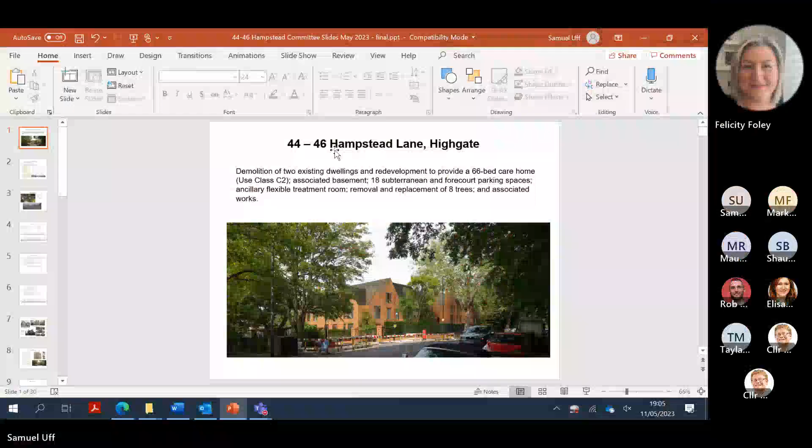Right, we will now consider the planning applications. So this is item 8, and it's the 44 to 46 Hampstead Lane. That's pages 1 to 82 in the pack, and the reference number is 2731. I won't read it out because it's in the pack. The recommendation is to grant permission, and I would just like to notify the committee that I did agree that we would have a third objector speaking tonight. So I would just want you to note that. So I'm now going to pass this to the planning officer, Samuel Uff, and Samuel's going to introduce the application.

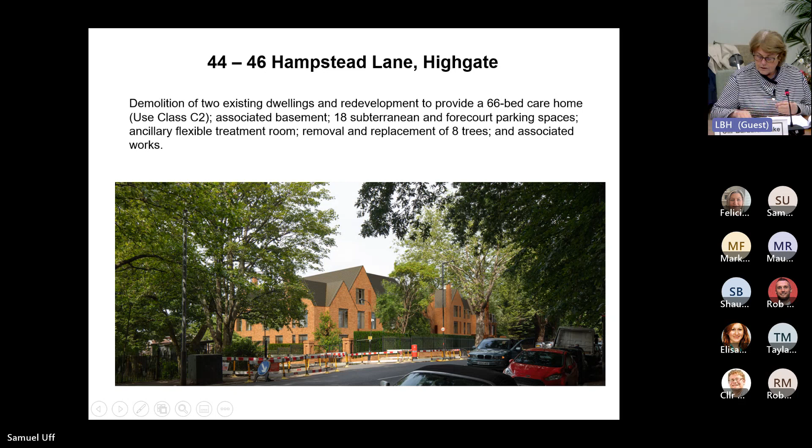Thank you, Chair. Good evening, all. So I'm sure you already know this is 44 to 46 Hampstead Lane in Highgate. The application is for the demolition of the two existing dwellings and redevelopment of the site to provide a 66-bed care home within the C2 use class. This will have an associated basement, 18 subterranean and forecourt parking spaces, ancillary flexible treatment room, and removal and replacement of 8 trees and associated works.

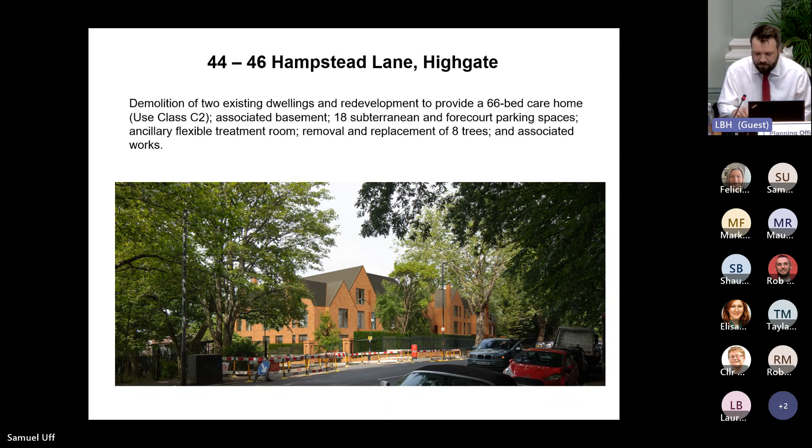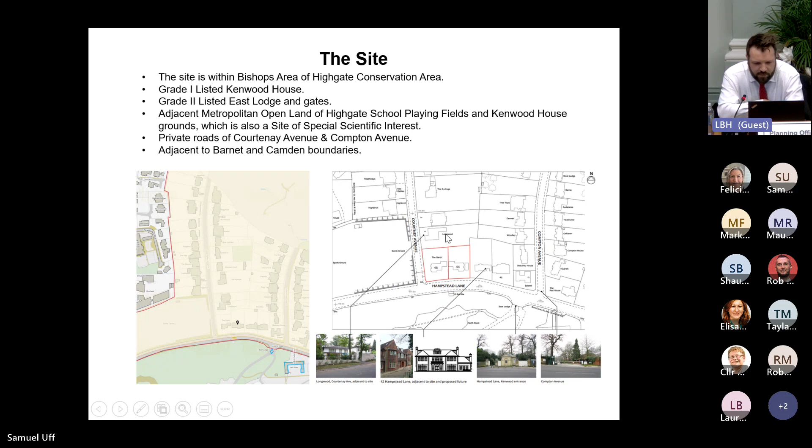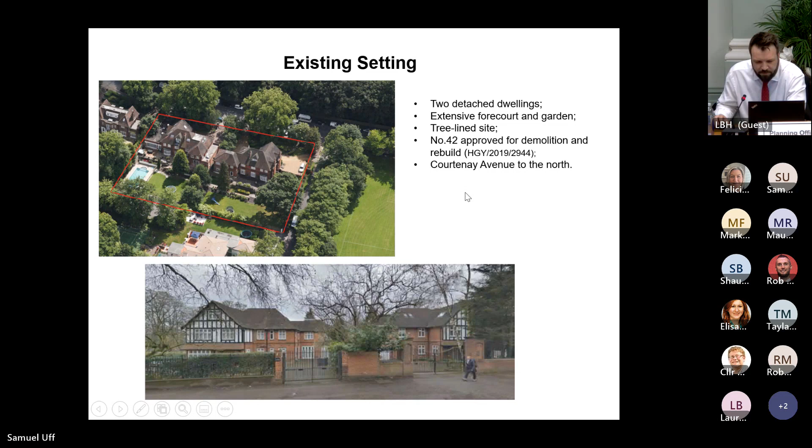A bit about the use would be that it's 24-hour nursing care, and does also have the treatment room, which is in the corner here.

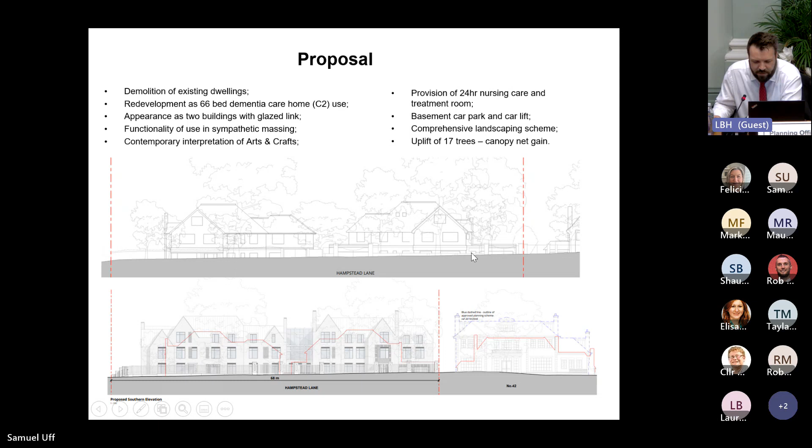So in terms of the principle of the use, the proposed care home has been determined to fall within the C2 use class as a managed care facility with no private ownership of the units.

In terms of national, regional and local policy, they all highlight increasing demand for elderly care provision and specifically dementia care. The applicant has provided two needs assessments carried out with regard to national and local data. These have raised issues of the ageing population, increasing cases of dementia within society and the locality, and issues of quality of provision. These highlight local shortfall and

substandard quality of the existing beds. Also that these are not future-proofed and/or not specialists for dementia care.

They've also highlighted the shortcomings in the COVID-19 pandemic, where substandard rooms, lack of en suites and wet rooms, cramped facilities and internal layout issues really highlighted those issues of cross-contamination between residents.

In terms of the type and tenure, this is considered to be suitable for the area, and the applicant has committed to target this at Haringey residents as captured within the Section 106.

Likewise, service provision within the site would be in the case of the 24-hour treatment, as well as cosmetic services that would be provided in-house and by visiting services. There would also be an NHS Section 106 contribution in terms of helping out local NHS services.

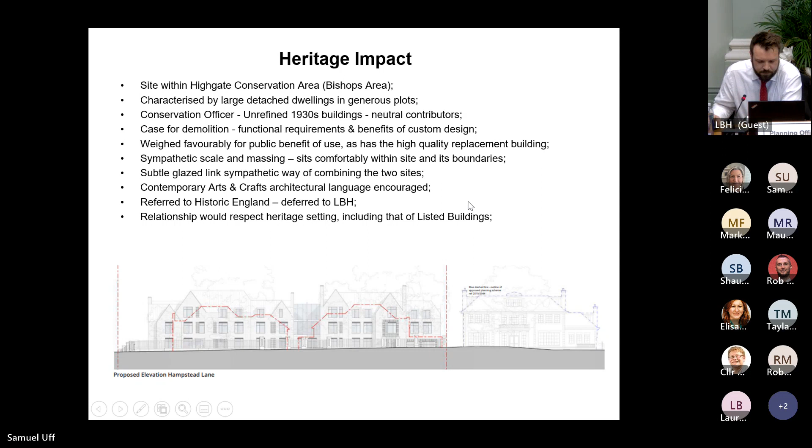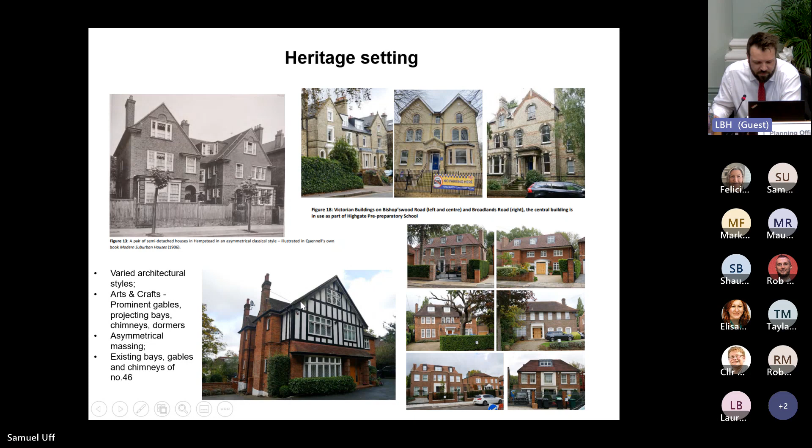In terms of the proposal, the detailed design would be in the arts and crafts architectural language, but a contemporary take on that. The design and conservation officers and the QRP have all been supportive of this approach through extensive pre-app discussion.

The frontages would be seen as asymmetrical massing, but would still have the appearance of the two houses, with a subtle glazed link sitting between the predominantly brick frontages. The prominent side gables, projecting bays and chimneys, sweeping pitch roofs and brick detailing of the proposed development would reflect that of the heritage setting.

These will also be in high quality materials, which would be captured in condition. The design of the roof and the height enables the solar panels and lift overrun to sit comfortably within it, so they'd be hidden from the street and views of the frontage.

The defined main entrances for the treatment room and for the main entrance to the care home would further enhance this appearance of two houses.

The proposed building would sit comfortably within the context, with massing similar to either number 42 as existing or as approved. This would be a modest increase in scale, but would be required for the use, and is considered to be comfortably accommodated within this setting while still retaining settings from side and rear boundaries.

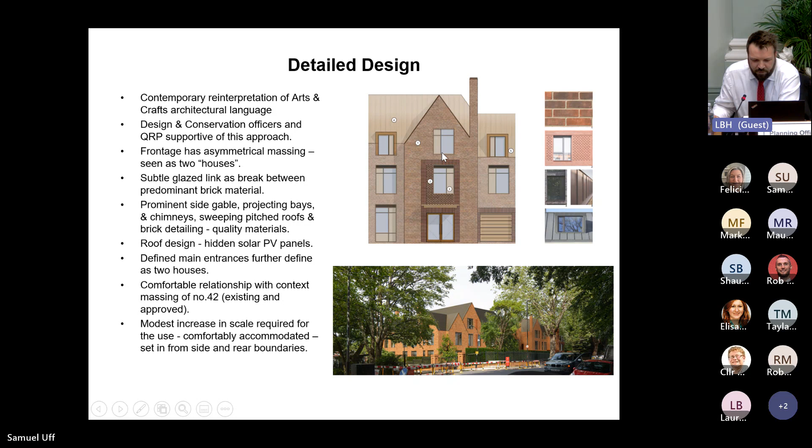Moving around to the side, this is the view as would be seen from Courtenay Avenue. As with the existing building, you can see there are prominent bays and chimneys which would sit within this frontage, but they would have a stepping down massing both from the Hampstead Lane frontage and towards the rear of the site, responding to that topography.

As you can see, the slope down is quite drastic, so this would be successful in incorporating the stepping down of massing.

You would still be able to retain views beyond the rear of the site, of the wooded rear gardens and golf course beyond. The boundary frontages and sides would be screened with boundary edge hedgerows and enhanced planting, as well as a railing on the outside.

You can see here the distinct relationship between the more prominent dwelling, existing and proposed, on Hampstead Lane, to the more subordinate Courtenay Avenue to the side.

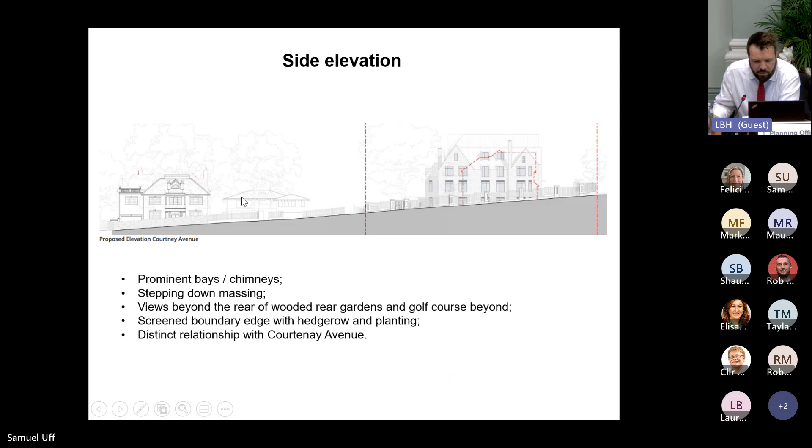Looking at the rear elevation quickly, here you can see again the rear massing is coherently stepped down and broken up with the use of balconies in recesses, subtle dormers and glazing which would sit comfortably within the roof. There will be relief from the side and rear gardens, and this would, as mentioned previously, retain and improve existing landscaping.

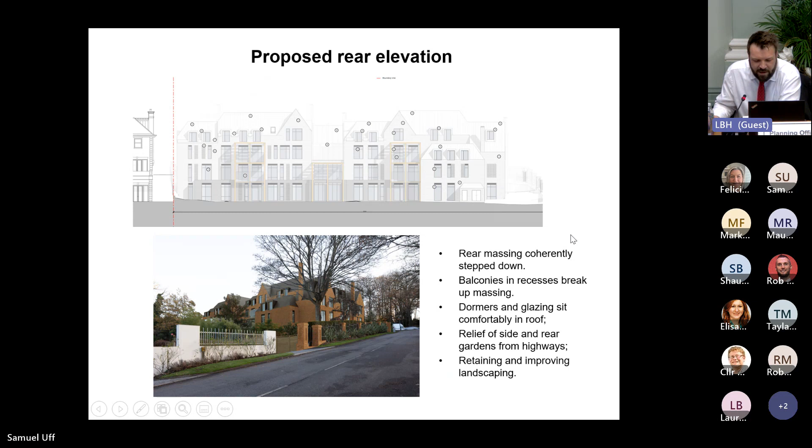In terms of the actual use and quality of the accommodation, as previously mentioned, it's a managed facility with 24-hour care. It will be fully accessible with lifts within.

There are 2 lifts within the core, and you can see from my cursor, 1 in each core, as well as 1 at the front, which would serve for refuse and servicing.

The layout of the flats and the use is dementia friendly, both internally and externally in the design, and the applicant has agreed to comply with the Stirling University accreditation, which is the highest standard for dementia care.

The layout of the flats, with private ensuite bathroom bedrooms, would be in small groupings, categorised by similar requirements. You can see the pink areas here, the 3 at the back.

Those are communal areas and would provide a varied space for residents. All the communal spaces and bedrooms would have views onto the landscape setting.

There will also be on-site facilities and services to the site, and the treatment room at the front of the site would have its own independent access, but would predominantly be used by the end user. The actual end use of that will be determined as this gets built out and in consultation with all stakeholders.

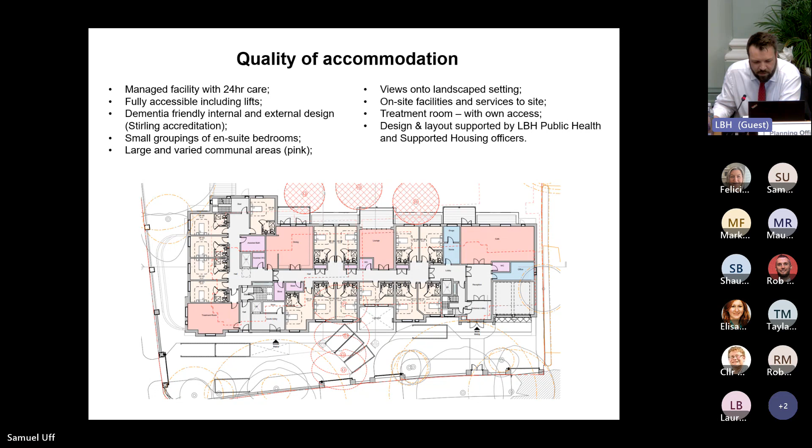The design and layout has been supported by the Haringey Public Health and Supported Housing Officers, who have been in contact with the applicant through pre-app discussions.

So the proposed basement would appear as 2 stories in the front part, but as it goes to the rear, it would appear as a lower ground floor and single-story basement, with the lower ground floor accessing directly onto the garden.

A detailed basement impact assessment has been submitted and reviewed externally for the council by structural engineers CampbellReith. The impact on neighbouring structures has been determined to not exceed Burland's Category 1, which is very slight, and this has been found to be structurally sound, subject to conditions and other legislation.

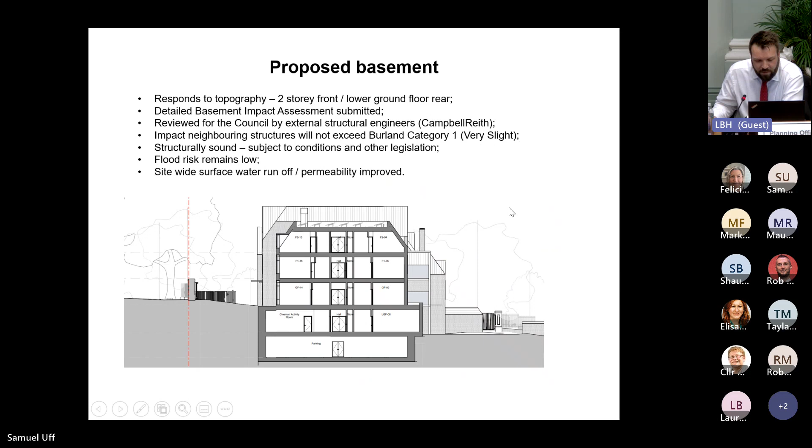The flood risk remains low, and the site-wide surface water runoff and permeability would be improved as a result of the development.

In terms of the transport impact assessment, there would be 18 car parking spaces, with 7 spaces in the forecourt and 11 basement car parking spaces, 2 of which would be for disabled access, also served by the lift, so it would be fully accessible.

In the front part here, you can see there are 2 car lifts, providing access from ground level to the basement. The transport assessment concludes that the site would be capable of accommodating the use.

There are 4 existing accesses to the site, two for each house. One here from Courtenay Avenue acts as a trades-in exit for servicing and deliveries, exiting onto Hampstead Lane. A separate vehicular access is accommodated for the basement car parking, which also has an out.

There will be generous storage provision of bicycles in the basement, and they're also investigating whether to include cycle parking for short stay on the forecourt.

The site does have a low PTAL of 1, but it is noted it has bus stops within close proximity - one directly out front of the building, and another just around the corner - which provide regular bus services to Archway, Highgate, Golders Green, and East Finchley tube stations.

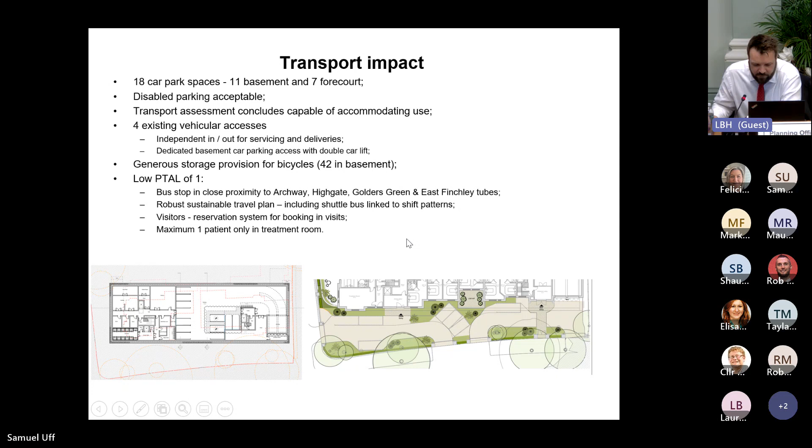In terms of visitors, they would be required to provide a reservation system for bookings. If the treatment room is to be used by the public, there would be a maximum of 1 patient at a time, so there would be no knock-on impact on transport there.

With regard to amenity, the main impact would be on 1 Courtenay Avenue to the north of the site and number 42 to the east.

Number 42 has been considered in terms of the existing and proposed building within the BRE daylight and sunlight assessment, which also considered the topography of the site and the sloping to the rear.

There has been an additional study which confirms there will be no significant overshadowing to the rear garden of number 1 Courtenay Avenue from the development.

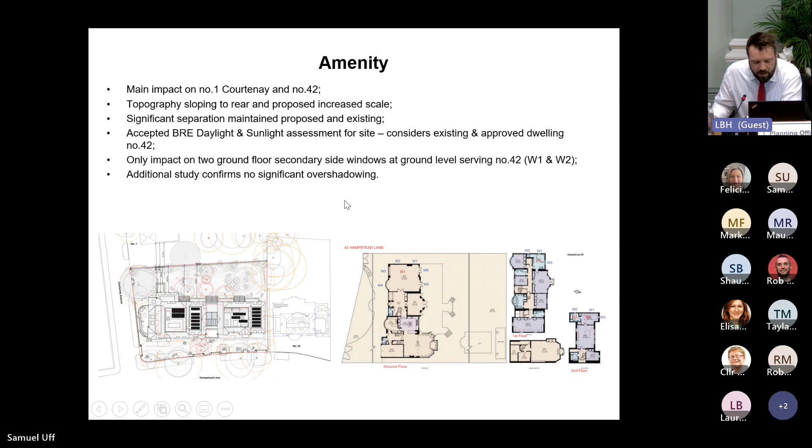In terms of nature conservation, the site has a historic area TPO which protects existing historic trees on the site. The application would include the removal of 4 mature trees at the rear of the site.

These are shown on the left, the red circles, and also a group of 4 smaller trees in the front of the site along the boundary, which are shown at the front here.

These four at the back have all been graded as low and moderate quality and have been assessed by the tree officer who agrees to the removal. The remaining trees on site would be retained and protected.

The boundary fencing and hedging would provide a green perimeter, which would be retained and improved. There would be no encroachments on the MOL or its setting. The MOL is Metropolitan Open Land, and the area in question would be Kenwood House Gardens and Highgate Playing Fields.

In terms of the proposal, it would provide a replacement of trees, including 10 multi-stem trees and 15 new large trees. There would be a net gain in canopy cover, which would be secured by a condition.

The landscaping of the rear has been specifically designed with dementia-friendly use in mind. There would be an improved biodiversity net gain and urban greening factor as a result of the development. Likewise, improved hard landscaping permeability and sustainable urban drainage systems would be incorporated into the design.

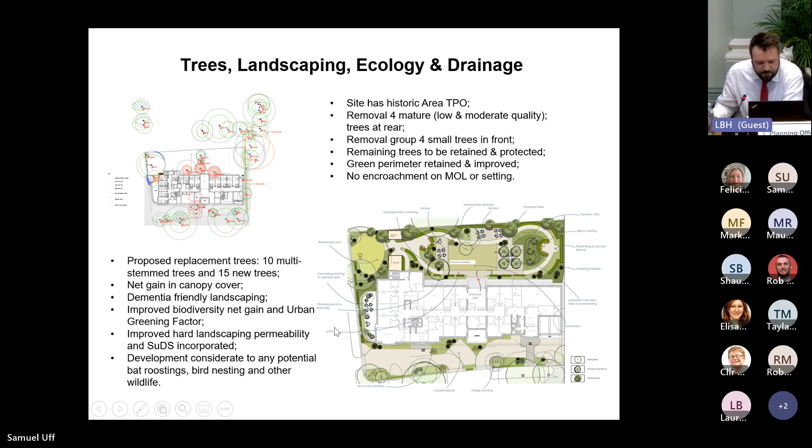So with sustainability, the design has been comprehensively worked through with a strategy considering u-values of floors, windows, walls, and roof, cooling, heating, lighting, and thermal bridging. The site offers improvements of 37% carbon emissions.

And in terms of green energy, there would be provision of solar PV panels, shown on the roof, and air source heat pumps. This would provide a 21% reduction in carbon consumption. There would also be ongoing site monitoring, which would be conditioned.

Overall, the site has a carbon shortfall of 22.2 tonnes of carbon per year, and this would be offset for a Section 106 financial obligation.

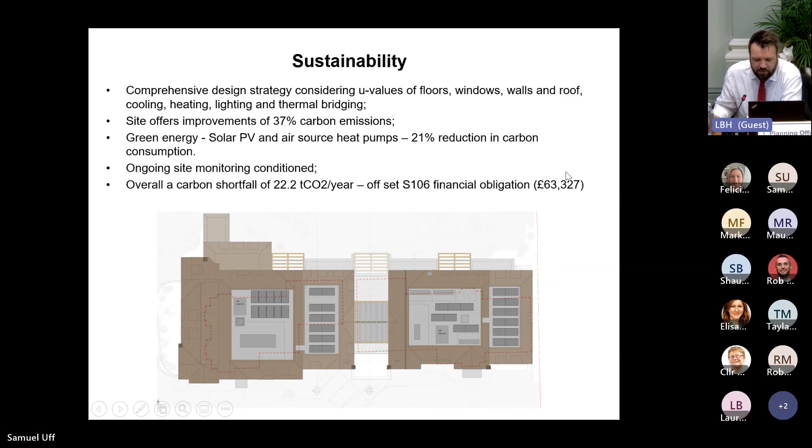Just to touch on some other issues of the site, it is within an archaeological priority area, and a condition for a scheme of investigation has been attached to the decision.

The site would also provide employment opportunities within the new care home as well as in construction, and there would be a Section 106 requirement for 20% local workforce.

The layout would be fire safety compliant, and this was considered to be acceptable in terms of secure by design, which would also be conditioned.

So in summary, the significant local need for such a dementia specialised care home has been successfully made. The high quality arts and crafts contemporary take on design is encouraged, and this is considered an appropriate scale within that context. There will be very low, less than substantial harm to the designated heritage assets, including Kenwood House and the conservation area.

This has been considered acceptable in highways impact terms. The site would offer improved sustainability and energy efficiency, and there would be a net gain of trees and improved landscaping. There are a number of Section 106 obligations attached to the recommendation.

Most notably the NHS financial contribution, which would support local resources, primary healthcare arrangement for residents, and a site-wide management plan, which would include the use of the treatment room and how that would be used.

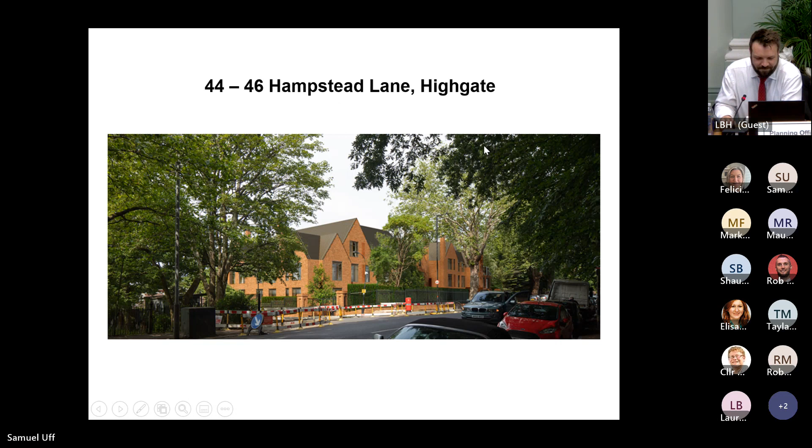Thank you, Chair. So I've just got two questions. It was mentioned that there's a significant local need and high proportion of older people in Haringey who this type of tenure would appeal to, but there's no data or stats provided. What is the stats and data to corroborate this?

And secondly, I understand there is no policy required for affordable housing for care facilities, but it's mentioned under 6.1.27 at page 23 of the papers that the assessment of need outlined highlights a significant demand for the proposed use in this area, which is considered to provide a public benefit. But depending on affordability, would this actually benefit the wider public or just an exclusive proportion of the population? Thanks.

Yeah, so in terms of the data, there are two needs assessments which have been submitted. We have got extensive data within there. The planning report does refer to specifics from within that, and the shortage of bed spaces and the quality of beds therein.

And just on the other point about affordability, yeah, in terms of care provision, there is no requirement for having an affordable housing provision. Obviously, within different areas of the borough, different products will appeal to different people. This would potentially be aimed at local people who already live in the area, and that is part of Section 106, which would encourage people within the borough to use the facility. But yeah, in terms of the actual financing of that, it would be on a needs basis.